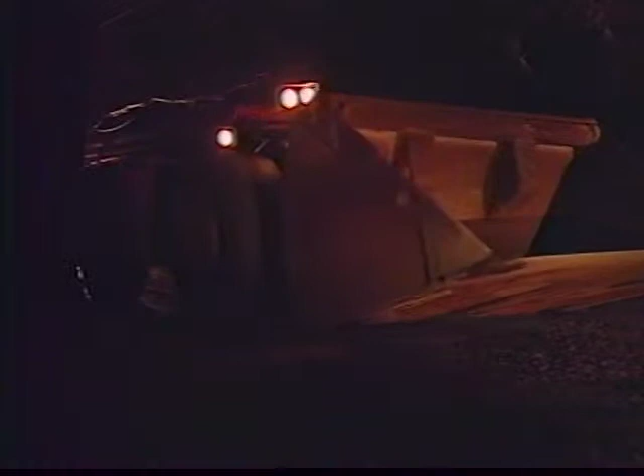First undeniable principle of mining: the mining and processing of a gold deposit is an extremely expensive operation. Among other things, it requires large-scale mining equipment and milling techniques, considerable infrastructure, extensive feasibility studies, and a long period of construction.

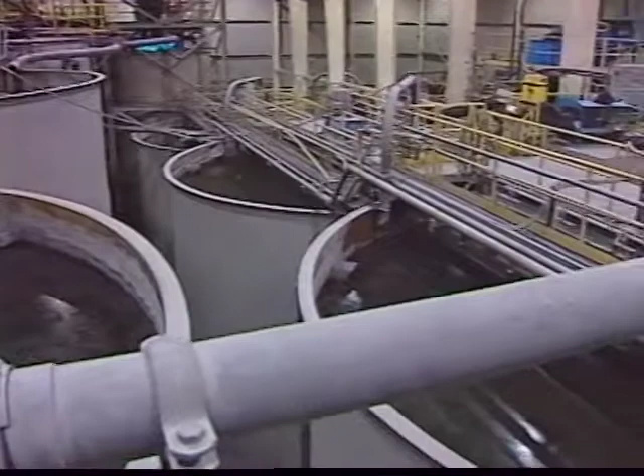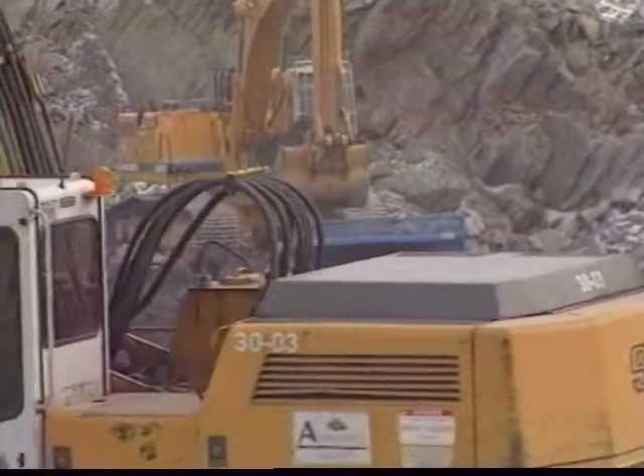Second undeniable principle: to be financially viable, the gold deposit has to be sufficient in size and grade to justify the considerable investment costs involved. Now there's good news for owners of small gold deposits. We're about to turn those basic principles on their heads.

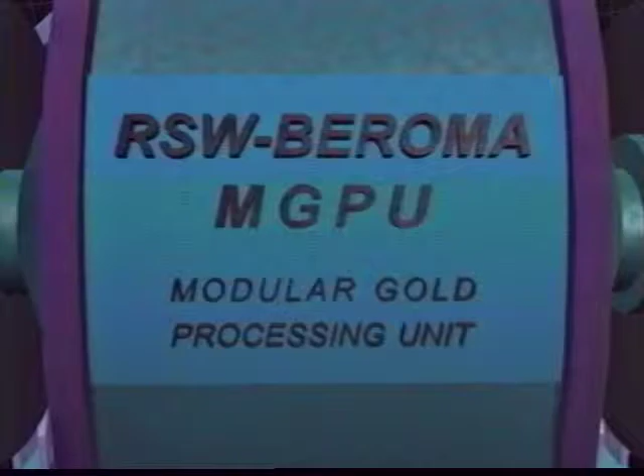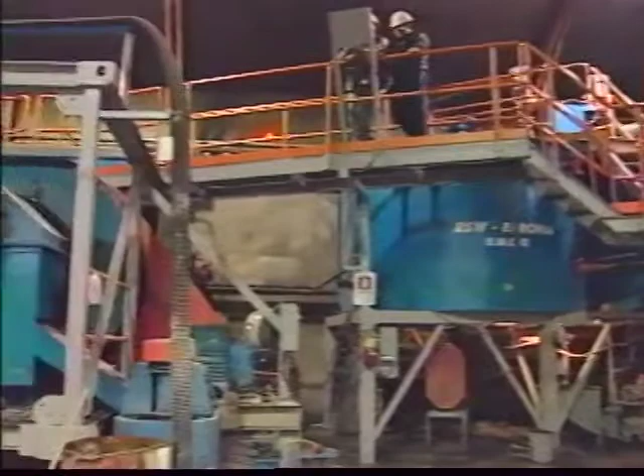We're here to announce a brand new milling concept, the MGPU, the Modular Gold Processing Unit, designed specially for small-scale mining. Its low capital cost and its modular and mobile characteristics make the MGPU essential for the exploitation of small gold deposits.

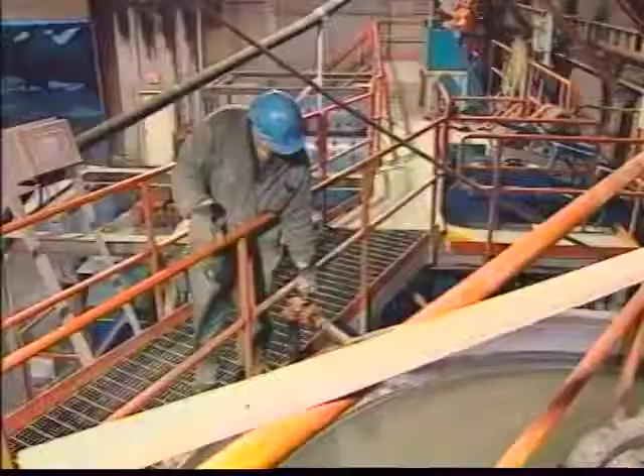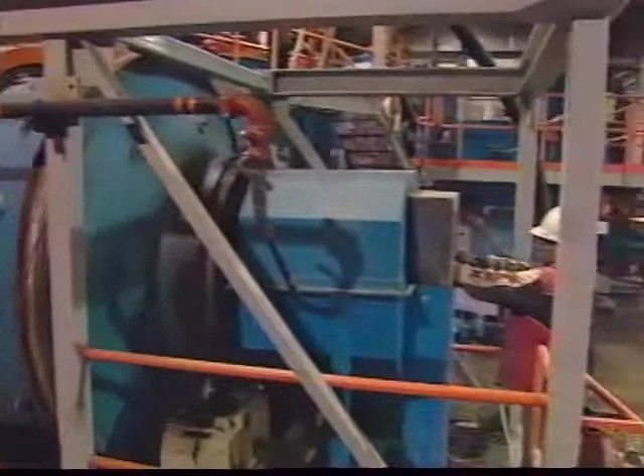The MGPU concept was developed following several years of research at RSW Beroma, a company comprised of two major partners: the RSW Group Incorporated, a Canadian engineering consulting company involved in mining and metallurgy over the past 30 years, and Beroma Industries Incorporated, a well-known mining equipment manufacturer operating in the Abitibi mining camp in the province of Quebec.

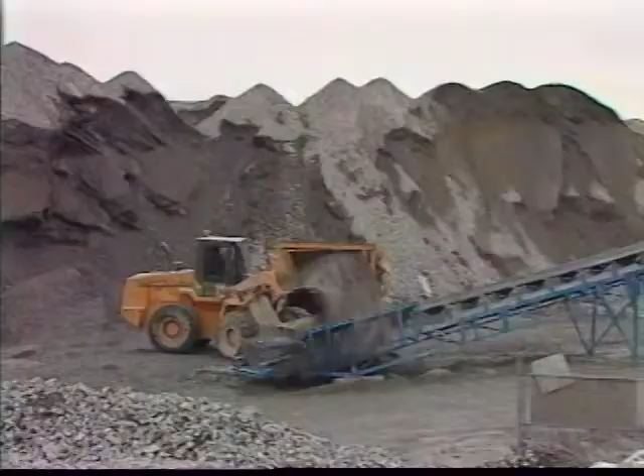Recognizing the specific needs of small-scale gold producers in North and South America, as well as in Africa, and having gained considerable expertise in the area, RSW Beroma has developed a unique modular milling concept, as well as a range of consulting services required for turnkey projects, from exploration to mining and milling of small ore bodies.

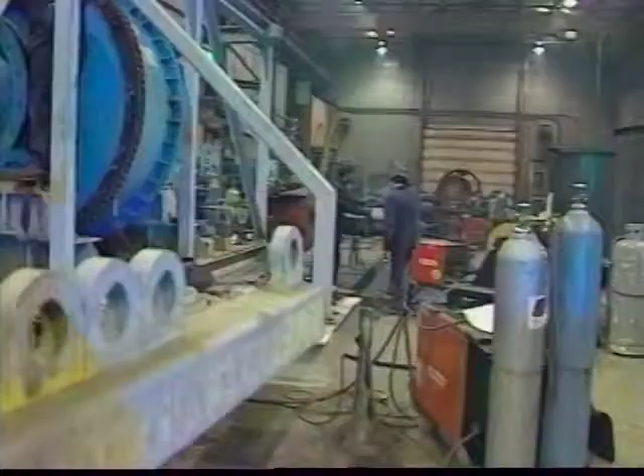Among these services: assessment studies, geology, reserves, feasibility, etc.; mining, mechanical, and civil engineering; component manufacturing and construction of the MGPU itself; installation, startup, and fine-tuning of the MGPU; and finally, the whole process of technology transfer and training.

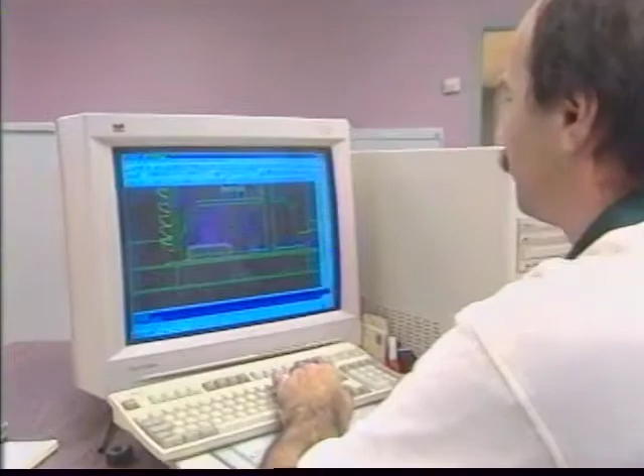Among the major advantages offered by RSW Beroma Integrated Consulting Services are flexibility, with experts willing to step in at all stages of a project, as well as the variety of services involved in a turnkey operation, from start to finish. Using this formula, RSW Beroma sketches out the whole range of activities involved in a small-scale mining project, from preliminary feasibility studies all the way to setting up the MGPU on a clear production schedule with a precise budget to match.

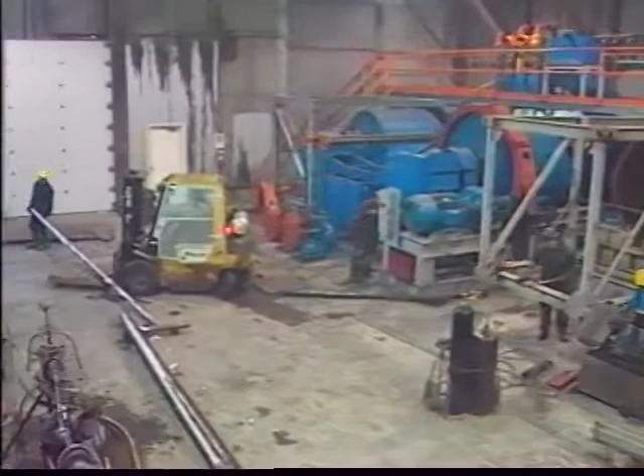Following production startup, RSW Beroma continues to work closely with the client all through the mining process, ensuring the technical assistance and fast after-sales servicing of the processing unit, including maintenance, repairs, and supply of spare parts. Owners of small-scale mining projects will be happy to learn that the MGPU is eligible for various forms of financial assistance, whether the mining is done in Canada or elsewhere in the world.

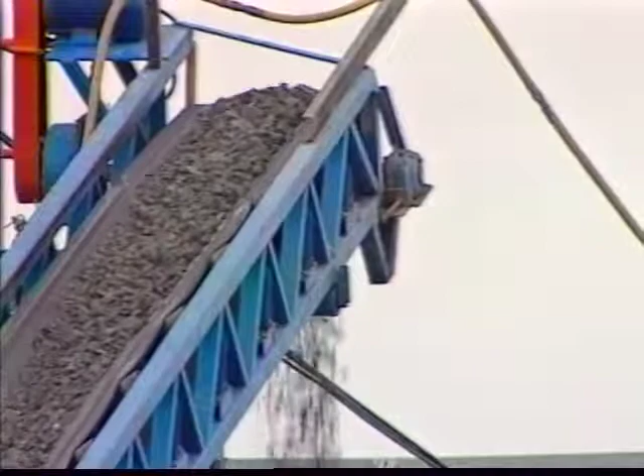Each new project requires its own mineral processing technique. Following initial laboratory studies, RSW Beroma Engineering Services will specifically design the MGPU to take into account the metallurgical characteristics of the ore body. The required equipment is then manufactured according to engineering specifications.

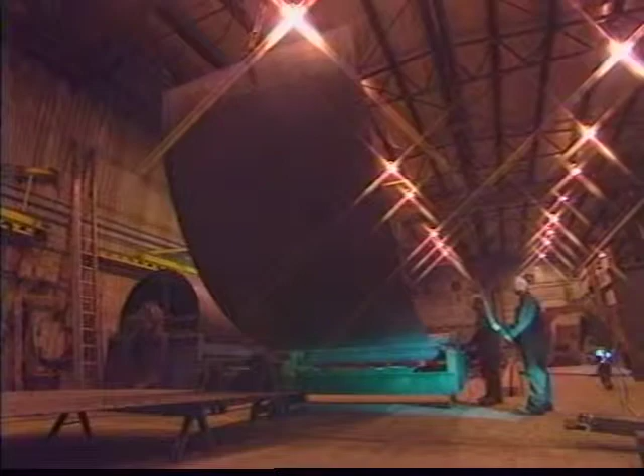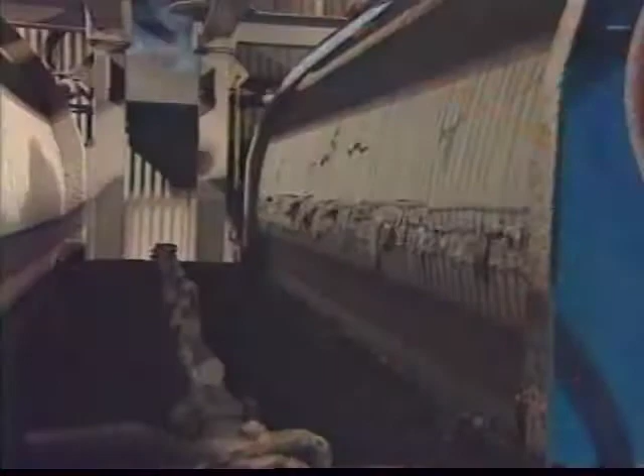The MGPU may include the following modules: crushing, grinding, thickening, gravity concentration, flotation, cyanidation, filtering, and a gold precipitation unit using either the Merrill-Crowe or the activated carbon process. The MGPU also includes components for refining the ore, allowing for actual on-site gold pours.

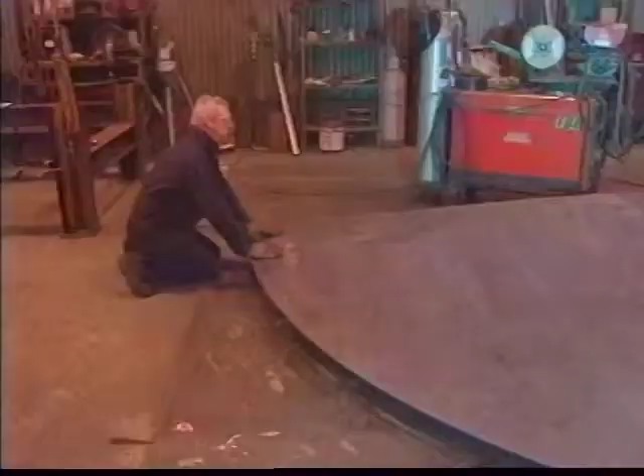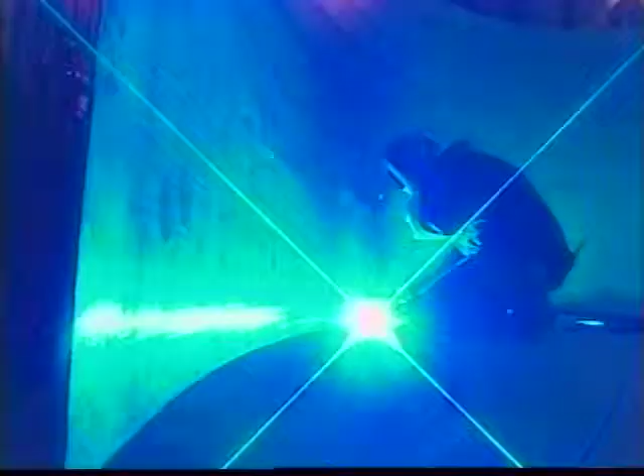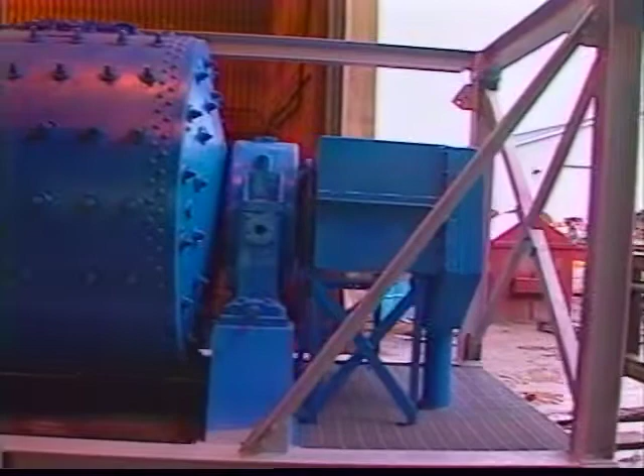What is terrific about the MGPU is its modular concept. Each component is prefabricated in a shop in such a way that it ensures a quick and easy assembly in the field. The MGPU modules are built according to standard container sizes of 6.1 and 12.2 meters in length, ensuring easy handling during transportation and installation on site. The modules can be transported either by land or by sea without requiring any further preparation or packaging.

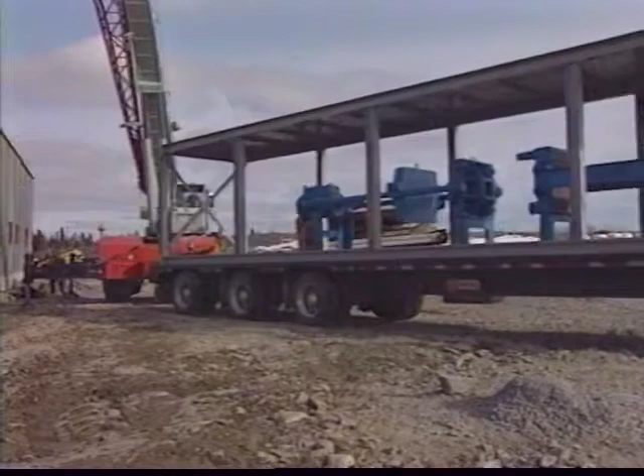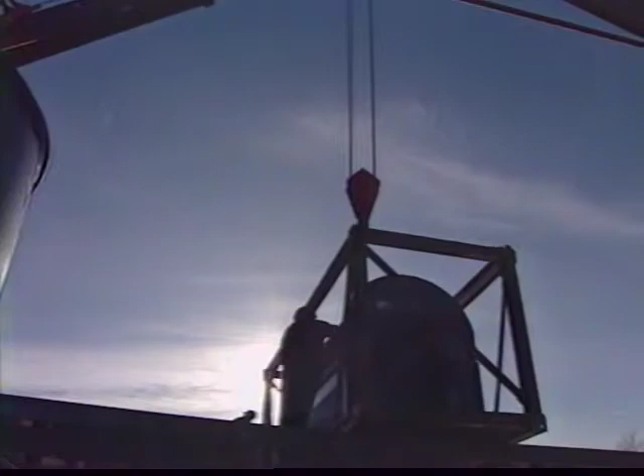During the installation of the unit on a concrete base, the modules can be placed either side by side or on top of one another, according to the overall MGPU installation plan. Certain parts that are prefabricated in sections, such as cisterns, are reassembled and welded on site.

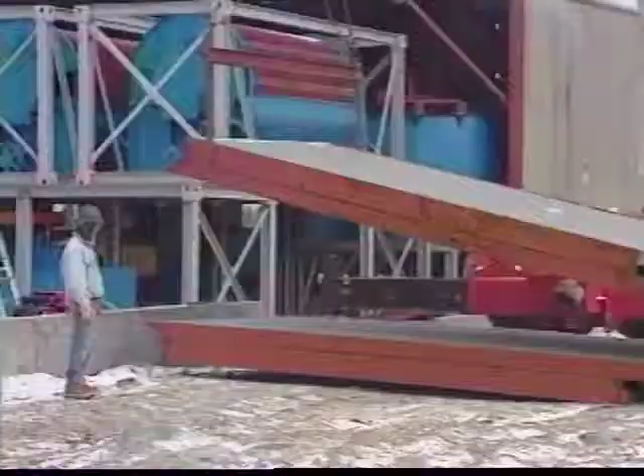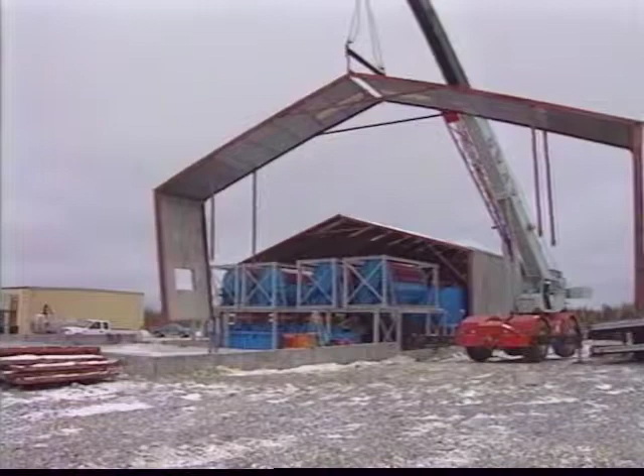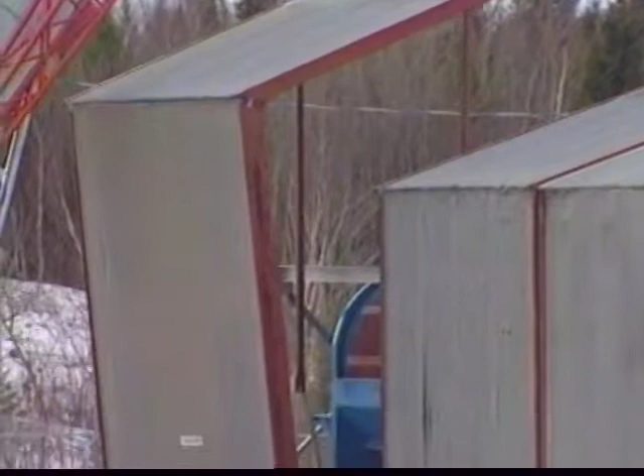Based on the general geographical layout of the site, including climatic conditions, an overall housing structure is required to protect the plant against any adverse weather. Again here, RSW Baroma recommends modular housing with prefabricated panels. The integration of these modular technologies, combined with sound planning, enables RSW Baroma teams to put in place the components of the MGPU and the protective housing structure in less than 7 working days.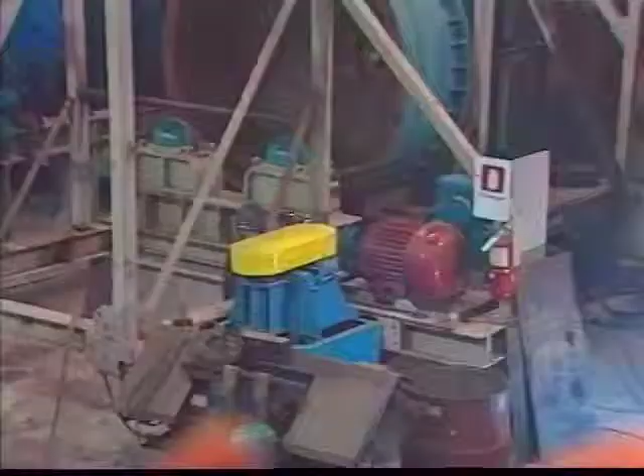Once the housing is in place, specialized teams proceed to piping, wiring, and complete installation of the plant within 3 months.

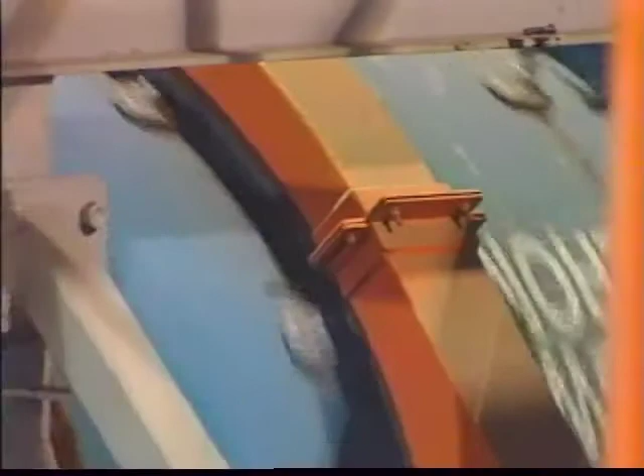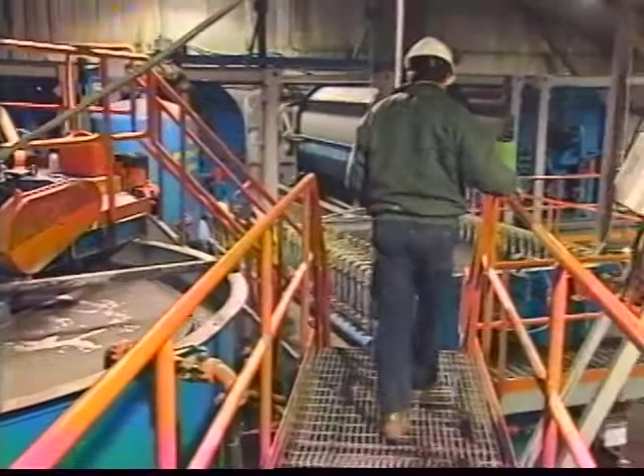The milling capacity of the unit varies with the project and can be as high as 250 tons per day. The recovery rate for the MGPU is approximately 70% for gravity-based processes and as high as 96% when cyanidation is used. For a typical MGPU, milling 200 to 250 tons per day and using the direct cyanidation process, the size of the foundation and the main operating parameters are as follows.

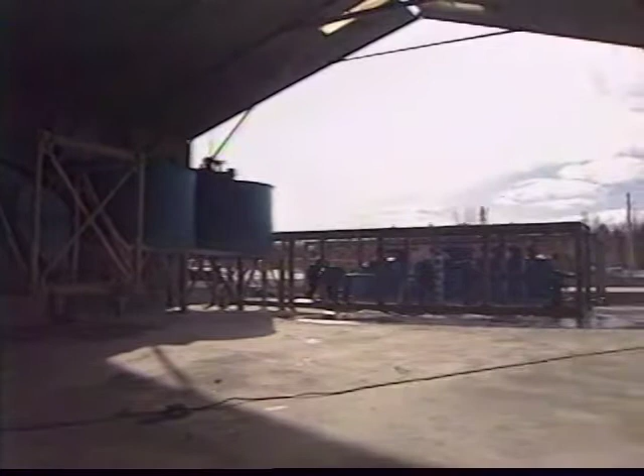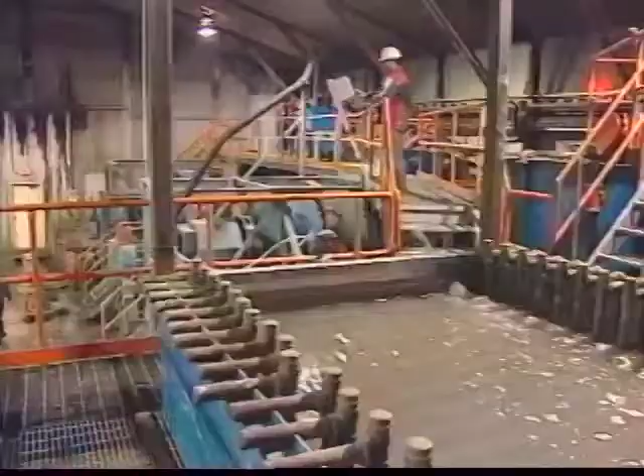A light concrete slab 15 centimeters thick, 20 meters wide and 40 meters long, surrounded by a low protective wall used to confine accidental discharges. Electrical energy of approximately 50 kilowatt hours per ton of ore. Fresh water consumption of 0.5 cubic meters per ton of ore, as more than 70% of the processed water is recirculated.

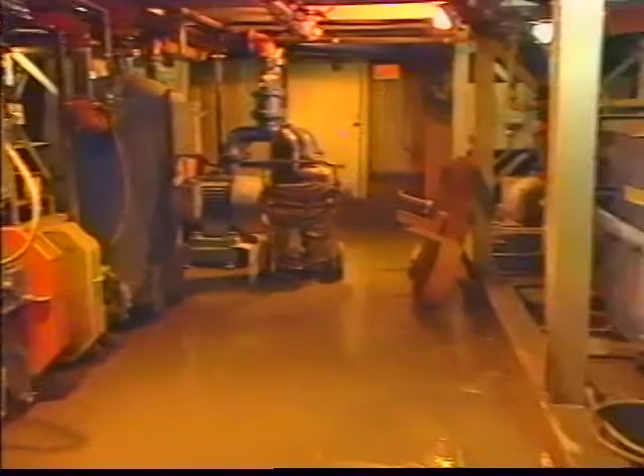Electrical energy is furnished either by public distribution system or by generators. Water comes from existing aqueducts or from a well drilled specifically for the needs at hand. The MGPU also features a cyanide destruction circuit and a tailings disposal system to ensure environmental protection.

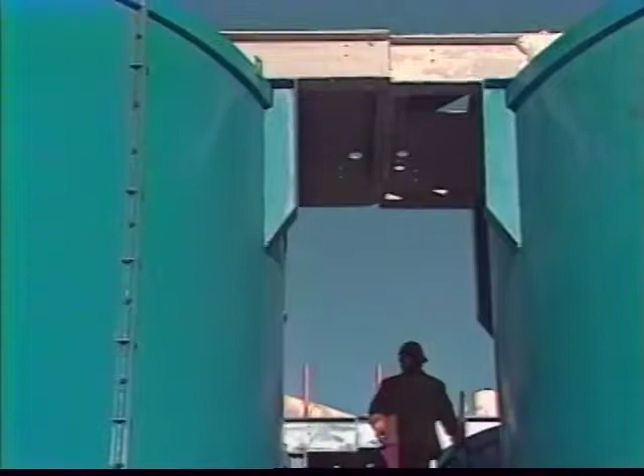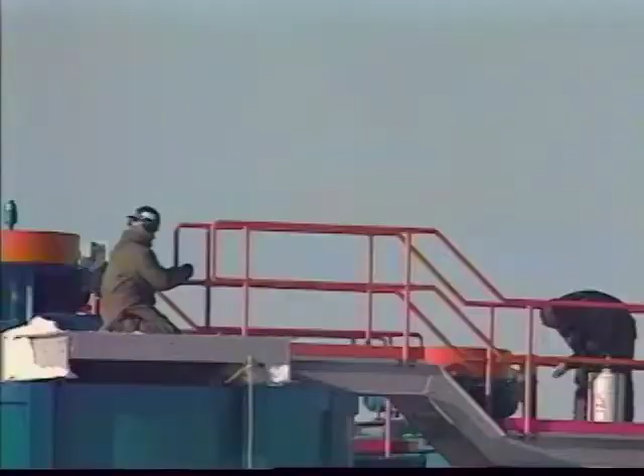The MGPU's original concept shows key features essential to small-scale milling processes: modularity and mobility. The MGPU's modular concept offers a simpler and faster method for bringing a mining project on stream. It allows the MGPU to be dismantled and reinstalled on another site once the initial one has been mined out.

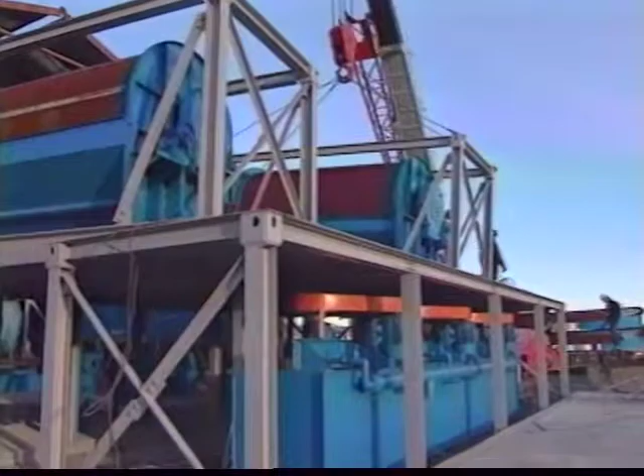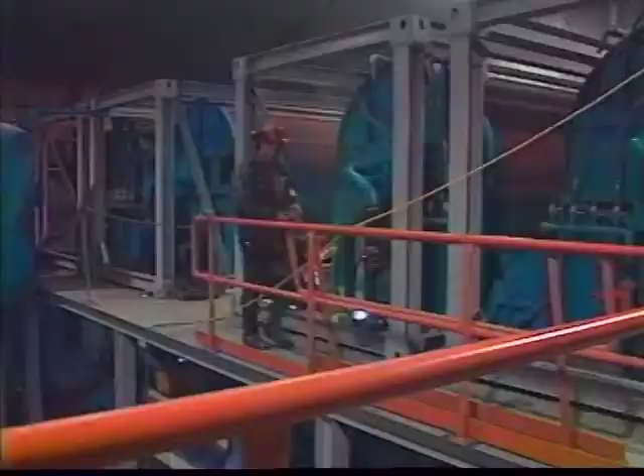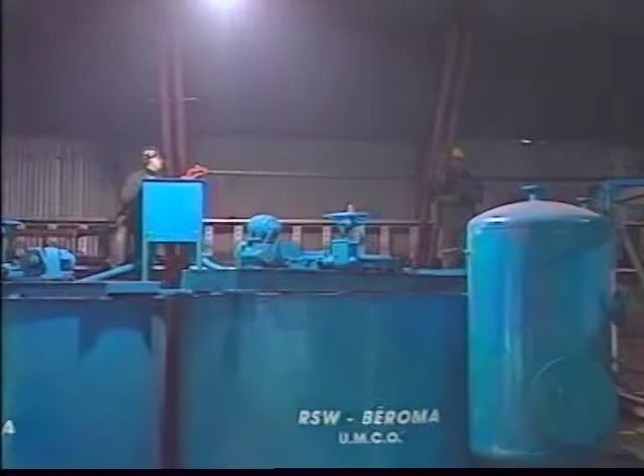Other major selling points for the technology: low purchasing and operating costs, short installation time, and high return on investment. The low purchasing cost, as well as the possibility of extending payments over several consecutive projects, are key factors when it comes to making small-scale mining economically feasible. The small number of employees required to operate the MGPU is another important cost factor.

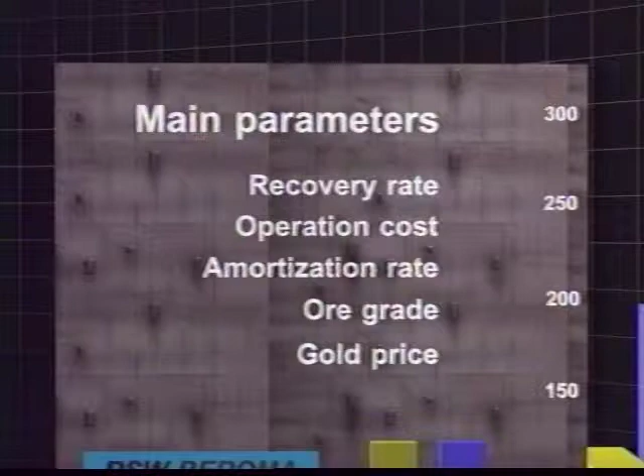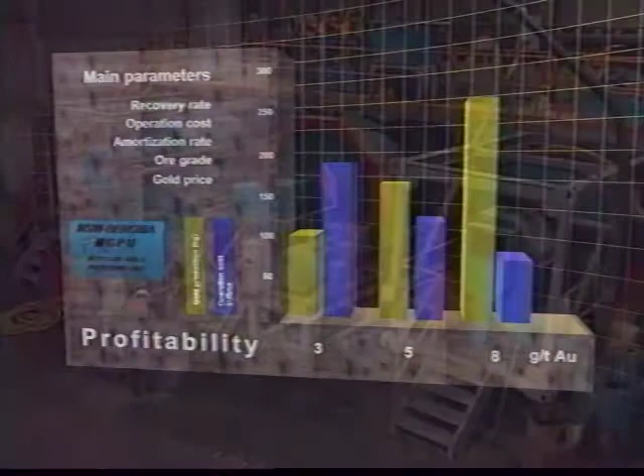The MGPU's return on investment varies with recovery rates, operating costs, amortization rates, ore grade, and the price of gold. In all these cases, RSW Beroma offers technical and economic feasibility studies relevant to the use of the MGPU for small ore bodies. The whole process of going into production with the modular gold processing unit can be completed in the relatively short period of 7 to 9 months, from the time the contract is allocated until full production is attained.

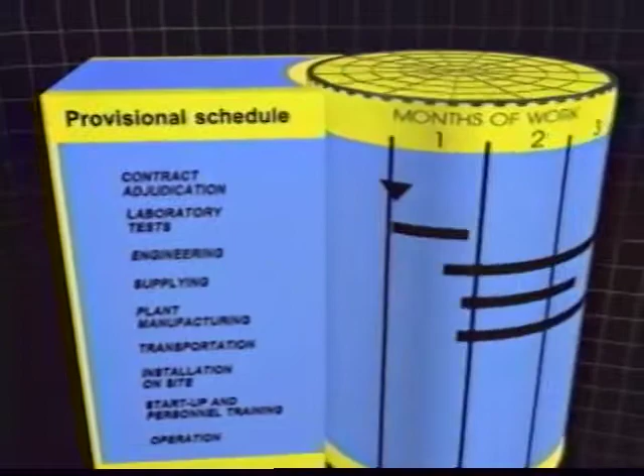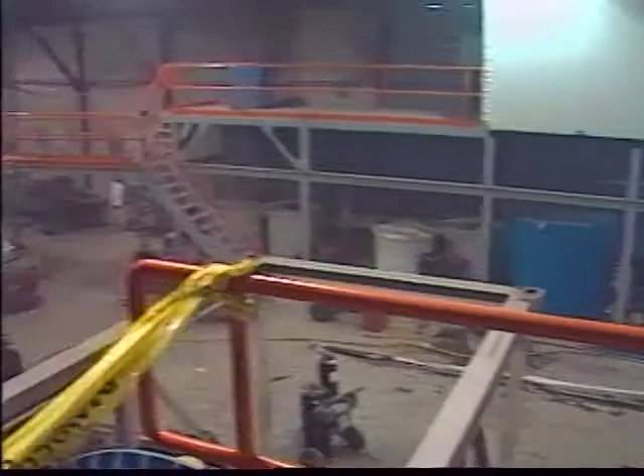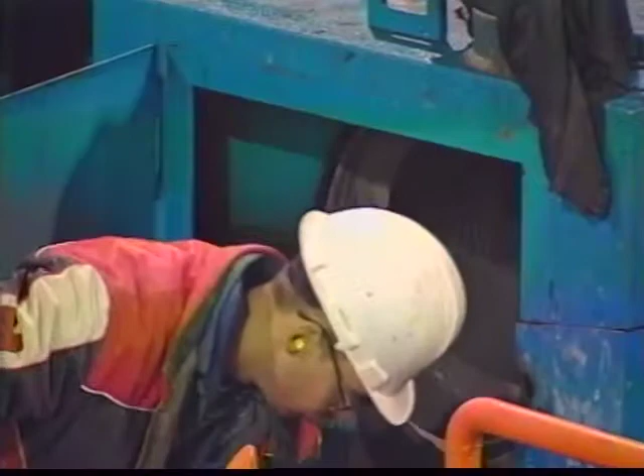In the case of a turnkey operation, RSW Beroma specialists do the installation and fine-tuning of the mill with assistance from local manpower. They then transfer the technological know-how over to the client and proceed to the training of personnel for the operation of the MGPU.

In summary, the Modular Gold Processing Unit concept offers 6 major advantages. 1. Of prime importance, it makes the mining of small gold deposits financially feasible. 2. Easily transported and installed on site, as well as rapidly dismantled and moved out to another site. 3. Operates with only 2 employees per shift, who require but a minimal training period. 4. Projects move into production at an accelerated rate, providing a faster return on investment. 5. A safe operation in terms of impact on the environment.

6. RSW Beroma's unique approach of integrated services and turnkey projects.

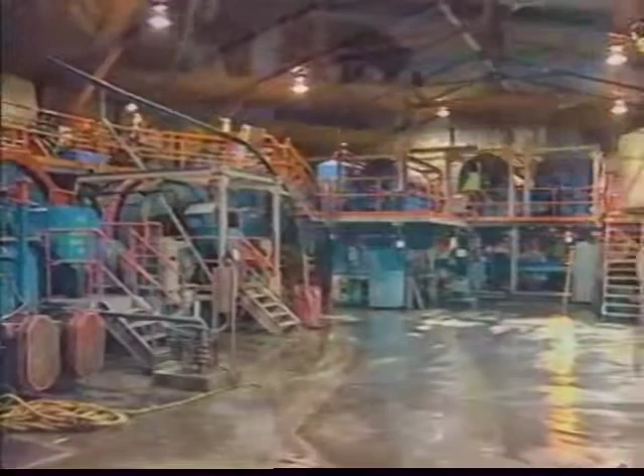You aren't dreaming. We're no longer at the hypothetical stage. The MGPU is real, and it works. The mining of small ore bodies has become economically feasible, thanks to RSW Beroma's Modular Gold Processing Unit. Small-scale mining is now possible, more than ever, thanks to the MGPU.